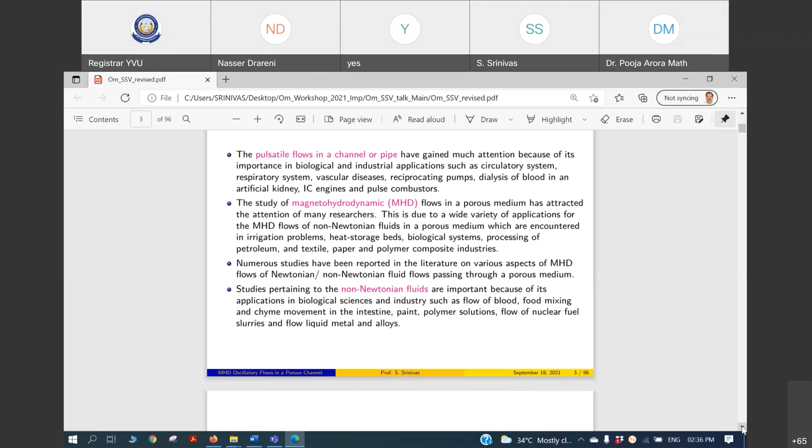We also couple this with MHD. So the study of MHD flows in porous medium has attracted the attention of many researchers. This is due to a wide variety of applications for the MHD flows of non-Newtonian fluids in porous medium, which are encountered in irrigation problems, heat storage beds, biological systems, processing of petroleum and textile, paper and polymer composite industries, and so on.

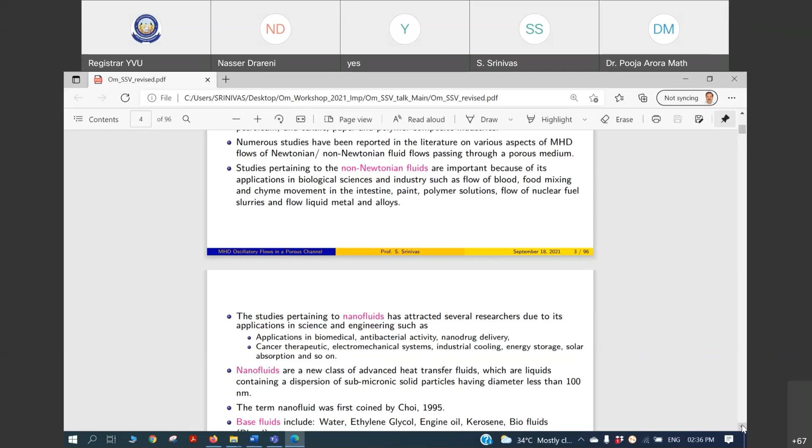Numerous studies have been reported in the literature on various aspects of MHD flows of non-Newtonian fluid flows passing through a porous medium. Further, studies pertaining to non-Newtonian fluids are important because of their applications in biological sciences and industry, such as flow of blood, food mixing, and chyme movement in the intestine, paint, polymer solutions, flow of nuclear fuel slurries, and metals and alloys.

Coming to nanofluids, two of my investigations deal with nanofluids. Studies pertaining to nanofluids have attracted several researchers due to their applications in science and engineering, such as applications in biological or biomedical fields, antibacterial activity, nanodrug delivery, cancer therapy, electromechanical systems, industrial cooling, energy storage, and solar absorption. Nanofluids are a new class of advanced heat transfer fluids, which are liquids containing a dispersion of sub-micronic solid particles having diameter less than 100 nm.

The term nanofluid was coined by Choi in 1995. We will be using base fluids and nanoparticles also. So base fluids include water, ethylene glycol, engine oil, kerosene, biofluids such as blood, and so on. Nanoparticle materials include oxide ceramics, metals, metal carbides, nitrides, and so on.

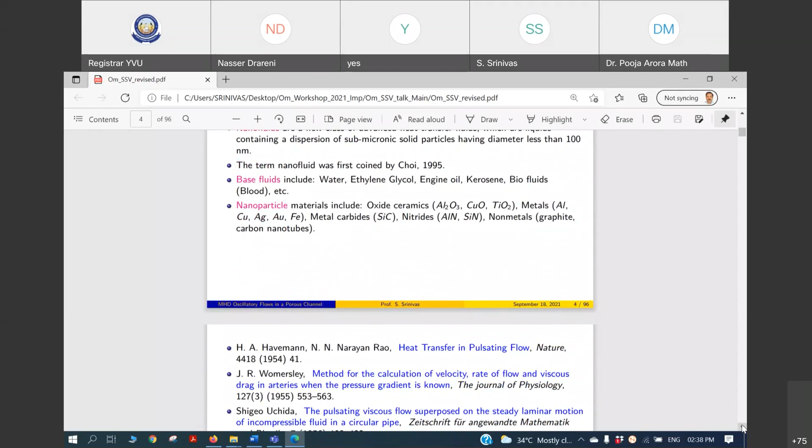Ever since the first investigation of Womersley, Uchida, Sexl, and a few others related to pulsating flow, several mathematical models, and of course some experimental works, were reported in the literature. If you look at the references that I'm going to show, the papers are scattered in robust journals covering a variety of areas.

Heat transfer in pulsating flow was reported by Havemann, published in Nature in 1954 - a method for calculation of velocity, rate of flow, and viscous drag in arteries when the pressure gradient is known. This article appeared in the Journal of Physiology in 1955. Later, Uchida studied the pulsating viscous flow superposed on the steady laminar motion of incompressible fluid in a circular pipe. The pulsating flow of plastic fluid is explored by Phan-Thien and Dudek.

In recent times, several developments took place in oscillatory flow. Recently, oscillatory flow of blood in a stenosed artery was investigated by Haldar. Later, Sud and Sekhon studied a number of investigations pertaining to pulsating flows. One investigation is related to flow through a stenosed artery subject to a periodic acceleration.

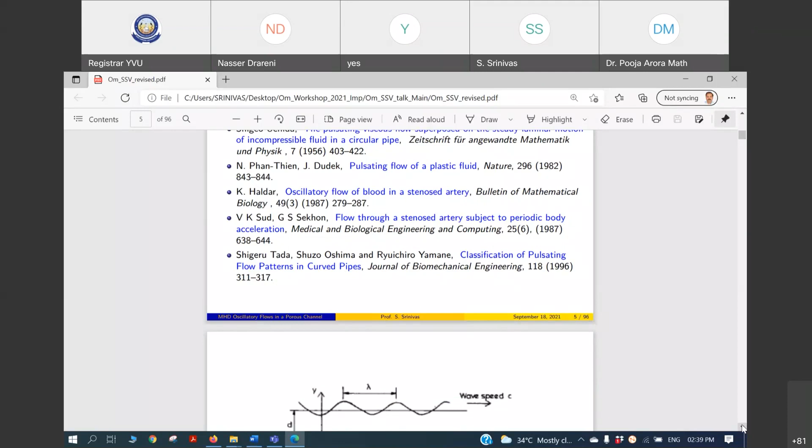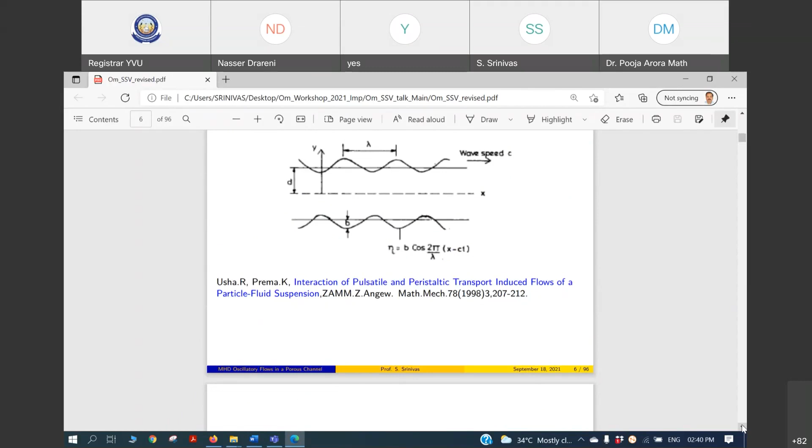Later, Tada, Oshima, and Yamane explored the problem of classification of pulsating flow patterns in curved pipes. Usha and Prema investigated the interaction of pulsatile and peristaltic transport induced flows of a particle fluid suspension, where the walls are extensible, that is, contraction and expansion takes place, and a periodic pressure variant is also there. So the combined effects have been investigated in this study.

The problem of oscillatory flow and its effect on mass transfer and separation of species was investigated by Thomas and Narayan recently, and that paper appeared in Physics of Fluids. Glasgow and Aubry investigated the problem regarding the enhancement of microfluidic mixing using time pulsing. Pulsatile blood flow, shear force energy dissipation, and Murray's law was investigated by Painter, Patrik Edén, and Bengtsson.

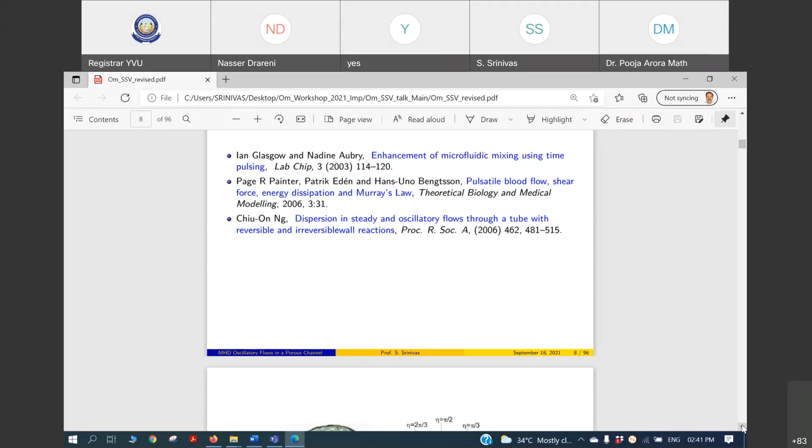Recently, the problem of dispersion in steady and oscillatory flows through a tube with reversible and irreversible reactions was explored by Chiu-On Ng. The analytical solutions for pulsatile viscous flow in a straight elliptic annulus and applications to the motion of cerebrospinal fluid was reported by Gupta, Poulikakos, and Kurtcuoglu.

It's an interesting investigation. They have taken the human problem related to cerebrospinal fluid. They analyzed the flow between elliptic annuli - this is the portion they have taken. The cross section is elliptic in nature, as you can see in this region. They mapped this to an elliptic annulus by using an elliptic coordinate system.

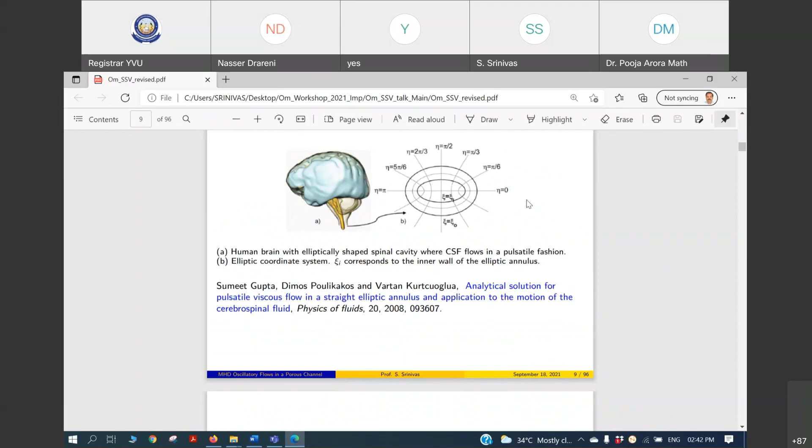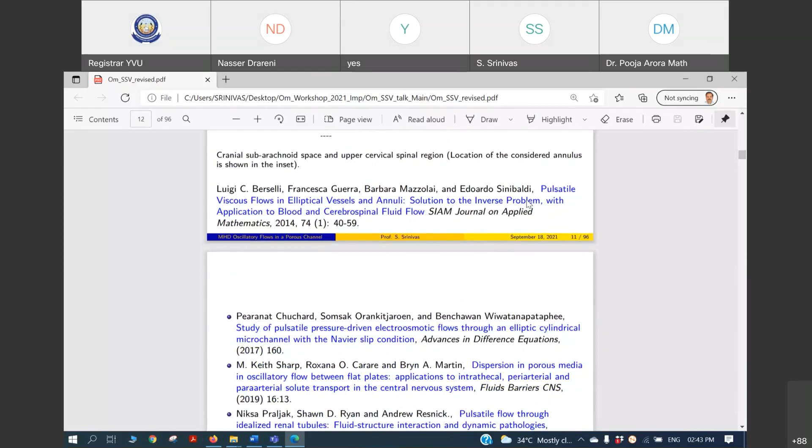This is one interesting investigation by Berselli and the team: the pulsatile viscous flow in elliptic vessel and annuli, solution to the inverse problem, with application to blood and cerebrospinal fluid flow. This was investigated by this team, and the same problem they analyzed, as mentioned in my previous slide.

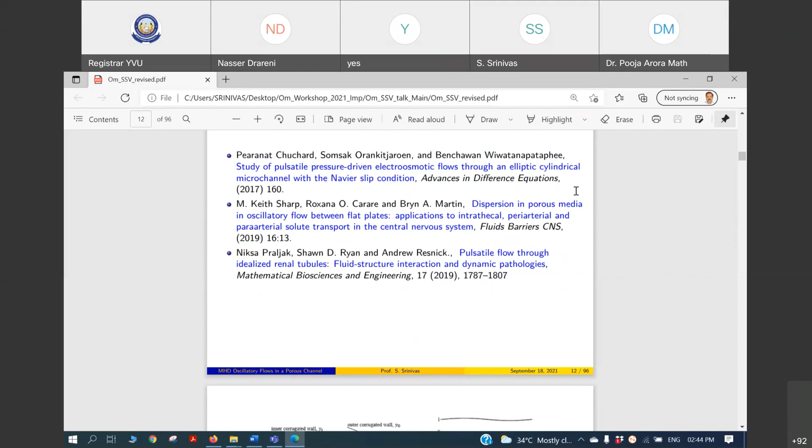Some more developments took place in recent times. A study of pulsatile pressure-driven electroosmotic flows through an elliptic cylindrical microchannel with Navier slip conditions was investigated by Chuchard et al. Later, Keith Sharp, Carare, and Bryn Martin investigated the problem of dispersion in porous media in oscillatory flow between flat plates, with applications to intrathecal, periarterial, and paraarterial solute transport in the central nervous system.

Later, Praljak, Ryan, and Resnick studied the pulsatile flow through idealized renal tubules, fluid structure interaction, and dynamic pathologies. In a recent investigation, Okechi and Asghar investigated the oscillatory flow in a corrugated curved channel.

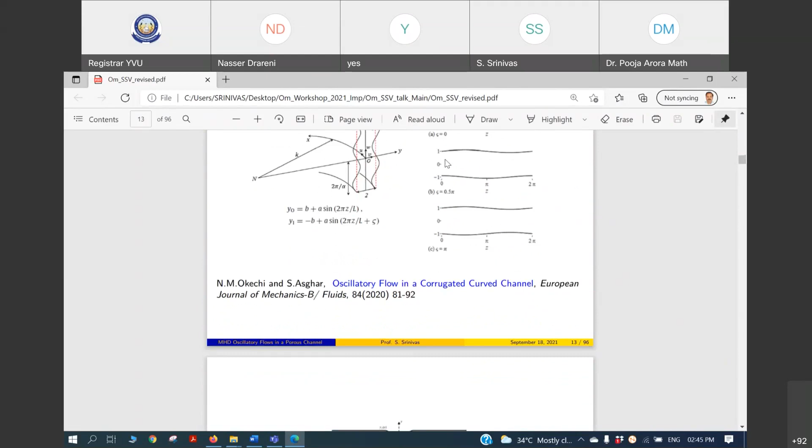This is more like an asymmetric channel. You can see the walls are having different shapes, and if curvature is also there, combined effects of this, they have presented this article. This paper appeared in European Journal of Mechanics, B Fluids.

Later, Ali, Muhammad Umar, Bukhari, and Abbas studied the problem of pulsating flow of a micropolar Casson fluid through a constricted channel influenced by a magnetic field and Darcian porous medium. They investigated the problem numerically. The results appeared in Results in Physics.

Later, pulsating Poiseuille flow in a cement slurry was investigated by Tao and the team. The impact of pulsating flows on particle deposition in forward osmosis with spacers was investigated by Andreas Kastl, Edo Bar-Zeev, and Spinnler, and Thomas Sattelmayer.

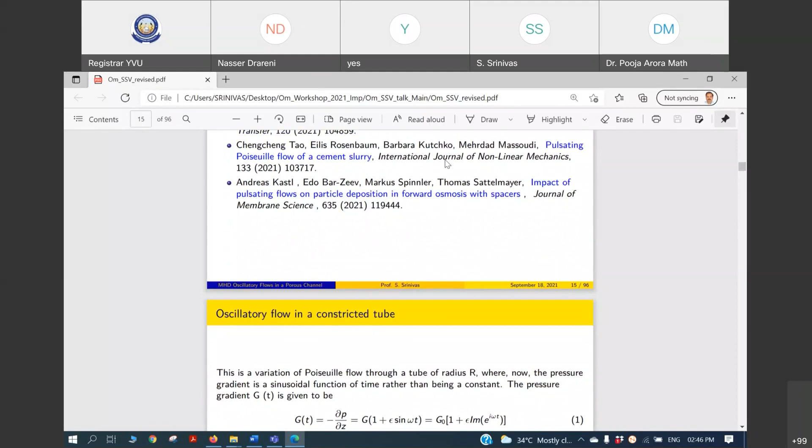So you can see that a number of domains these people have covered, and papers are scattered in robust journals, starting from Nature to Royal Society London and so on. That clearly shows that the pulsating flows problem is of interest for scientists and engineers working in different disciplines.

Let me just explain how the flow takes place in a tube. Assume that this is a variation of a Poiseuille flow through a tube of radius r. I'm taking only a tube, and I'm saying that the pressure gradient is a sinusoidal function of time, as described here in equation 1. Say pressure gradient.

Biologically, it occurs from the heart pumping mechanism. A periodic pressure gradient will be developed, that you can take as some function, some constant term plus sine terms, omega terms, and so on. So some authors will take this, for mathematical purpose, in this form: some constant plus 1 plus epsilon into cos omega t or sin omega t. In general, they take it as e power I omega t.

If cos omega t term is there, after the analysis is over, they take the real part of it. If sin omega t term is there, for analysis purpose, they take the imaginary part of the solution they get.

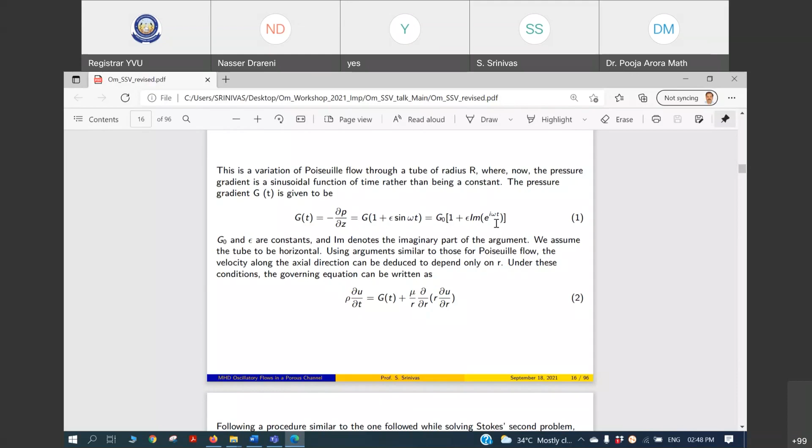In a tube without constriction or anything, if the flow is with a periodic pressure gradient, that problem can be modeled. The momentum equation reduces to this form: rho dou u by dou t, assuming that there is no velocity in other directions, so u is the velocity in the main direction only. So rho dou u by dou t is some function of t, plus maybe this may be from the pressure gradient term. You can take it as some function of t plus mu by r into dou by dou r of r dou u by dou r. I'm using the cylindrical polar coordinate system.

So if you want to study the flow distribution in the tube, you have to solve this equation for u subject to the periodic pressure gradient. So how to find the solution? You can take it as a constant part plus epsilon into e power I omega t. Im stands for imaginary part.

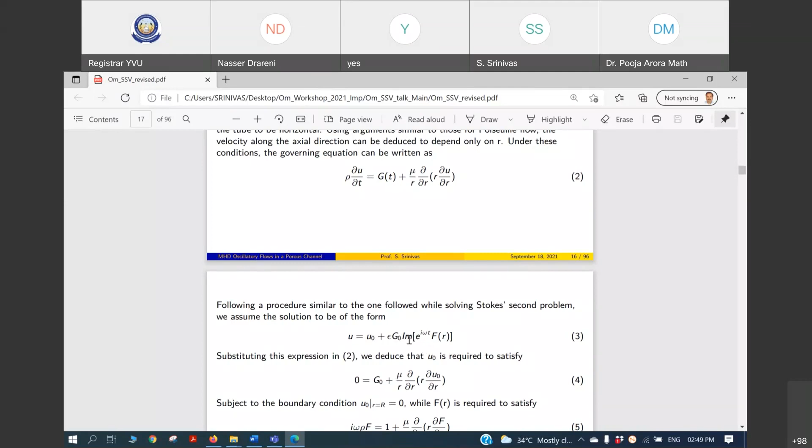into some function of r. So if I substitute u in this form, it comes to this particular structure. You can see that on rearrangement, it will come to a simple differential equation like I omega rho F equals 1 plus mu by r into dou by dou r of r into dou f by dou r.

The boundary conditions are that velocity is 0 on the boundary. Therefore, U on the boundary, r equal to capital R, capital R being the radius of the tube, so velocity on the boundary is taken as 0. You have to solve this particular equation using that condition. The maximum velocity occurs at the center of the channel because it is stress-free at the center of the tube. Therefore, mu dou by dou r is 0 at r equal to 0. That condition also can be used.

Now, on solving this particular equation, you can see that the solution comes to this particular form.

Right, here you have to find capital F. This capital F, when you substitute this and group the like terms, you'll get an equation in F this way. This is nothing but your Bessel's equation. If you identify this, that is at BTech level, we'll be teaching differential equations like x square y double dash

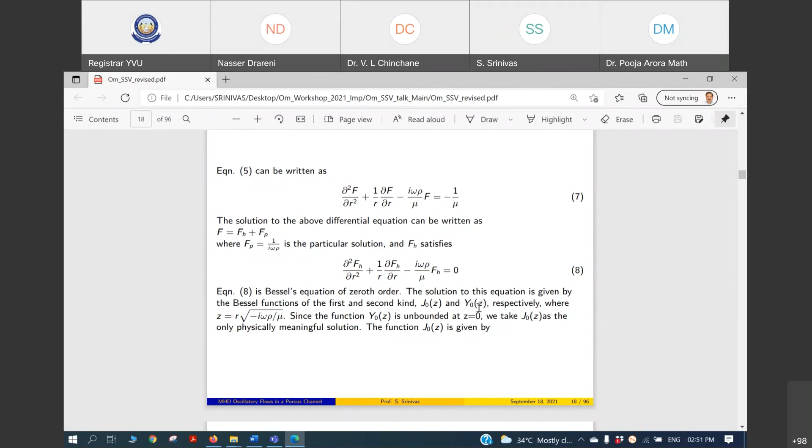So since our physical variables should be bounded, terms like y naught, they have, what you call, they are not defined at 0. Therefore such terms we omit. Therefore only terms containing Bessel functions will be taken.

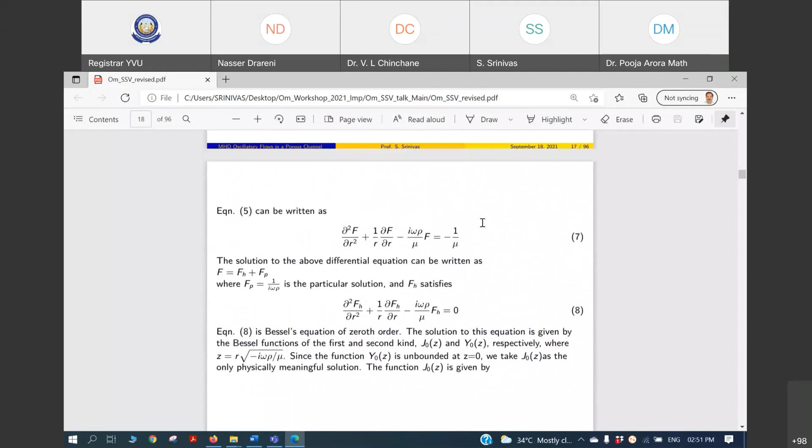Therefore the solution of this equation is going to come as f of r equal to 1 by. Let's not worry about how these terms are coming. Just I want to say that this is in the form of Bessel's equation. And if you solve this equation given in 7, it will come to this particular form. The other term plus b into that, we need not consider.

The only condition we have is this f is 0 on the boundary. Using this condition, you can find the value of a. If you use this condition, what is going to be our a?

First of all, you substitute everything in u, this u naught term and f term, everything here, and use the condition that u on the boundary is 0. Then the solution is coming to this particular form.

You can easily verify whether this is correct or not. When I take r equal to capital R, that is velocity on the boundary, if I take j naught will go away, this is 1, 1 minus 1 is 0. Similarly, when I take r equal to capital R, this is also 0. So u equal to 0 on the boundary, it is satisfying my requirement.

This is the flow distribution in the case of a simple tube. This is oscillatory flow, I've just taken a pressure gradient, periodic pressure gradient. The momentum equation boils down to a simple linear equation, it comes to a structure like a Bessel's equation of order 0.

Terms like y naught I can drop because I want bounded solutions. Then if I estimate the constant, a simple solution I'm able to get for the velocity distribution in a tube. These people describe it as blood flow in an artery, if the artery is of circular nature.

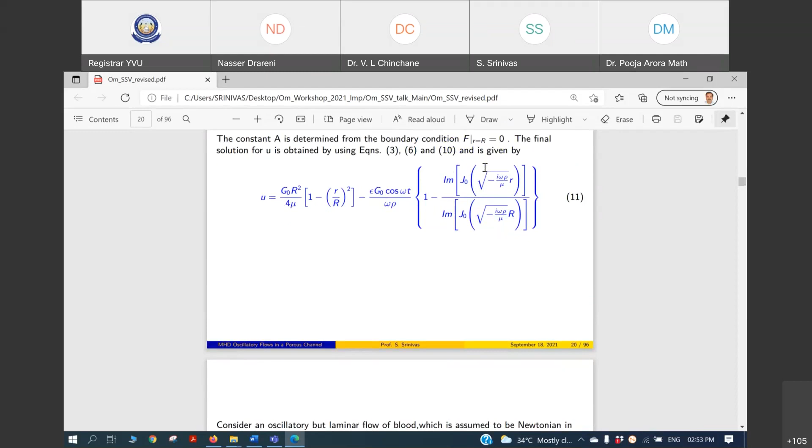Now if there is a small growth or projection inside the lumen of the artery, say instead of tube I just call it as artery, this is like a cylindrical tube. So the shape of the artery I'm taking it as Rx by R naught equal to 1 minus epsilon by 2 R naught into 1 plus cos pi X by D. This is the standard shape of the stenosis.

It's a symmetry case. There are other several geometries for the shape of the stenosis, multiple stenosis, so many other cases also there. But fundamentally the problem is going to be same. If you understand one, rest of the things can be analyzed without any difficulty.

Here, Rx is the radius of the artery in the stenosed portion, and R naught is the radius of the artery. 2D is the length of the stenosis, and epsilon is the maximum height of the stenosis. Okay, this is the problem by Haldar.

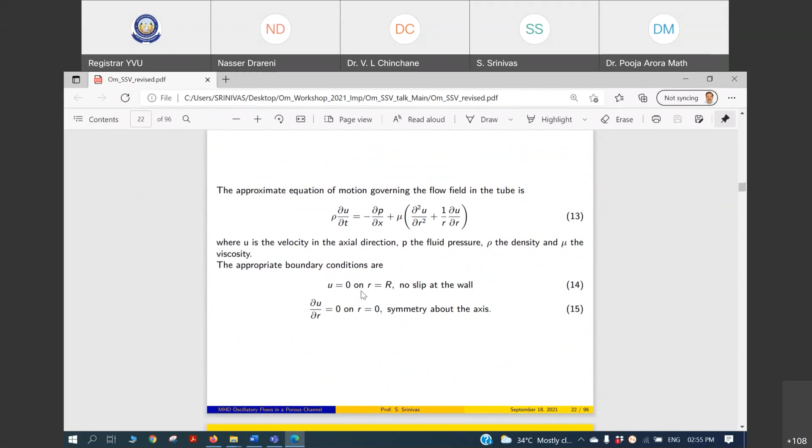Just I wanted to explain how the pulsating flow or oscillatory flow will be in the case of a constriction. Channel also we can study in a similar way, but less investigations are reported in tube. Therefore my interest is to present some ideas pertaining to this.

So the momentum equation boils down to this one. The velocity distribution in other directions we have not considered. It's like a laminar flow. So rho dou u by dou t, the momentum equation reduces to this, pressure, force, viscous forces, everything I have taken.

If some investigations, later investigations deal with body accelerations and so on. If such additives you want to bring, plus those terms also you have to add, that is rho into fx or fy, fz terms will be there. There you have to add the body acceleration terms. The problem is going to be same, more or less. So this particular equation with periodic pressure gradient I am taking.

Therefore, dou p by dou x can be replaced by a term like a naught plus some a1 into e power I omega t, cos omega t or sin omega t, as I can see at the end of the analysis.

The boundary conditions are the velocity is 0 on the boundary. I am not assuming there is slip or any other condition, it's just that I am using a no slip condition. Other conditions can be relaxed, but let's understand the problem first.

Later we can play with the terms. Since at the center of the channel the maximum velocity occurs, therefore dou u by dou r at the center is 0. This is another condition I can make use of. So this equation is subjected to the conditions 14 and 15: velocity is 0 on the boundary, and the maximum velocity occurs at the center of the channel.

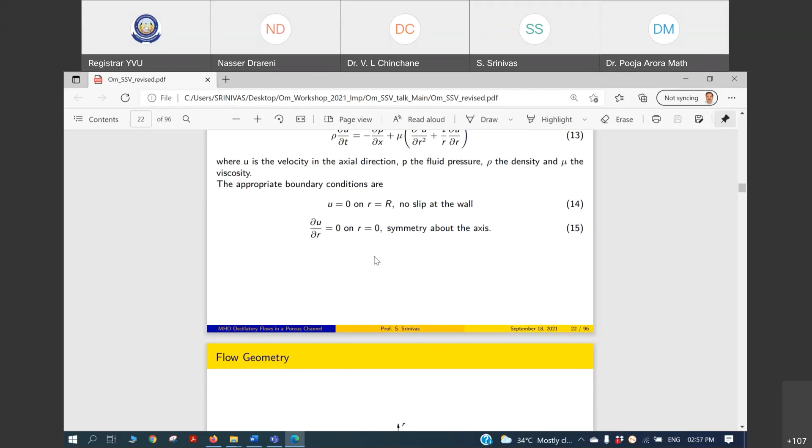Similar conditions I have taken in the case of pulsating flow in a tube without stenosis, so the solution we got earlier will get simplified here. A similarly structured solution I will be getting.

So this is the geometry of the stenosis. As I explained, 2D is the spread of the stenosis, L is the length of the tube, R is the radius of the stenosis, the radius of the tube in the stenosis portion, and R naught is the radius of the tube, and so on.

When I take the pressure gradient term and take the velocity in the form u bar y into e power I omega t, I use non-dimensional analysis by taking y equal to r by r naught. So everything I can put in terms of y, or without that we can put it in terms of r itself. For simplicity, I expressed this in non-dimensional form.

Now, taking velocity in this form u bar y into e power I omega t and the periodic pressure gradient, my problem boils down to investigating this u bar y. What is this u bar y? I have to find out.

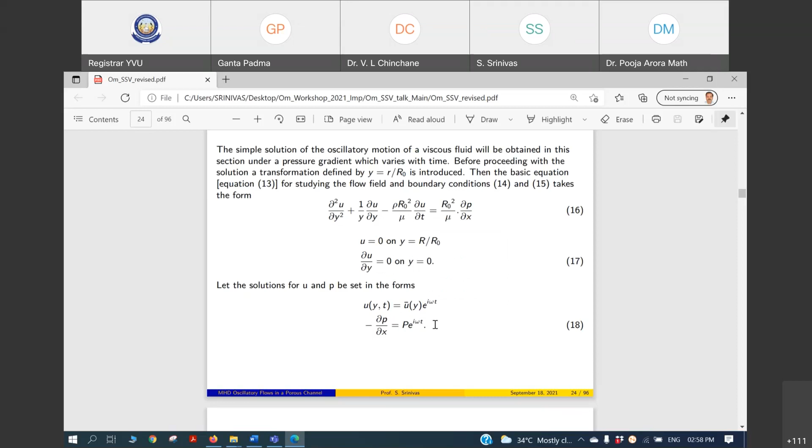This pressure gradient I am assuming is a periodic pressure gradient. So from this I can feel that the solution for velocity can be expressed in a similar structure. Therefore I am taking it as u bar y into e power. Substituting, making use of these two here in the given equation, it boils down to, that is in 16 you substitute 18, and this is what we are going to get.

D square u bar by dy square plus 1 by y du bar by dy minus I beta u equal to r naught square by mu into p. It's a simple substitution. You can properly label the terms. Beta square is rho r naught square omega by mu, as per our convenience we can take the terms.

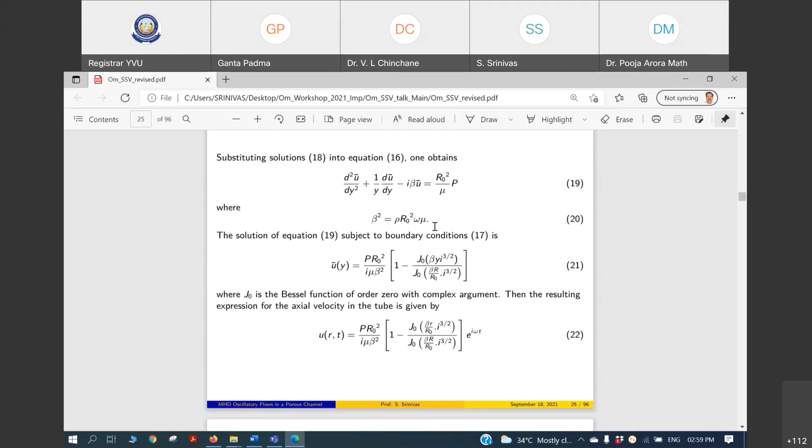I'm calling this beta, here beta square is this term. Now this is similar to what we have seen in the previous slide, it's like a Bessel equation. Of course some non-homogeneous part is also there, so the solution goes like complementary function, particular integral, and so on. This is a Bessel equation of order 0.

Y naught terms I need not consider because I want bounded solutions. When I take the derivative of this Y naught Bessel function of second kind by y, it will have a term that is not bounded at x equal to 0 or y equal to 0. Therefore that term we don't consider.

So u bar y can be found out, but the solution corresponding to this non-homogeneous part in 19, I have given in 21. You can verify whether this solution is satisfying our requirement or not. What is our requirement? The velocity should be 0 on the boundary.

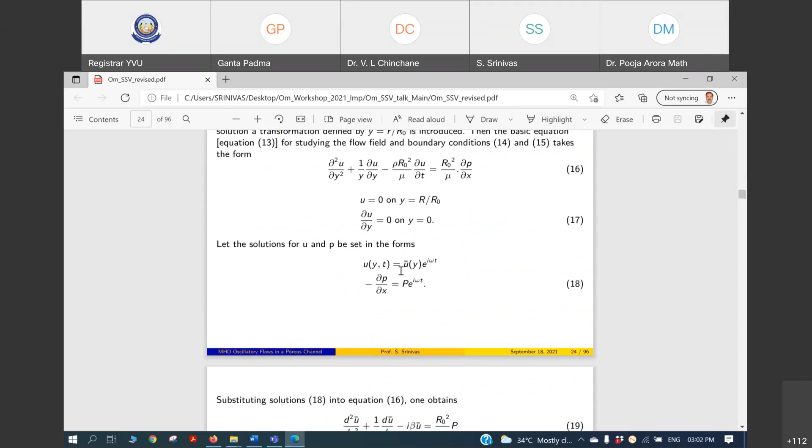What I have done is, after finding u bar y from this equation, I have substituted this in the expression here, u of y equal to u bar y. Whether I write this in terms of r or y, it is one and the same, because that is what I have done here. U r t equal to p r naught square by i mu beta square into 1 minus j naught with this argument, j naught beta r by r naught into i raised to 3 by 2 by j naught beta capital R by r naught into i raised to 3 by 2, into e power i omega t. This is the velocity in the stenosed portion.

Now this can be expressed in the real part. If cos omega t term is given for the pressure gradient, you can take the real part, otherwise the imaginary part. That depends on the nature of how you take the pressure gradient. So Haldar clearly explained how this real part, imaginary part can be taken. For this you can use the reference of McLachlan.

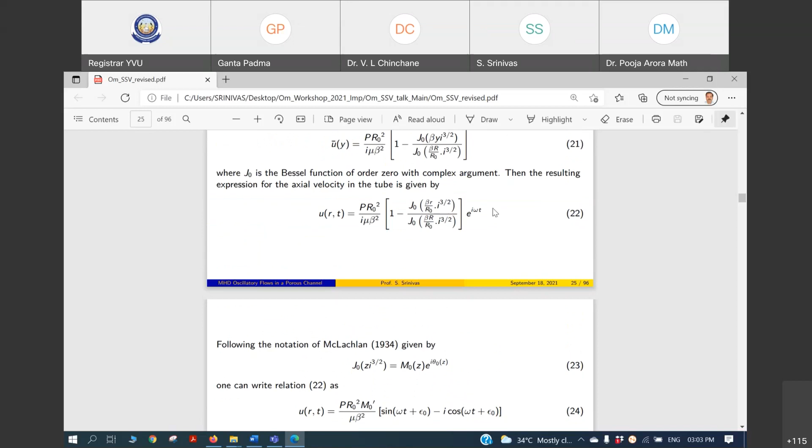Now, once you get this step, the rest of the part is simple. If you want mass flux, it is 2 pi r into u integrated from 0 to capital R, that is the boundary. Similarly, if you want the stress on the wall, you can find that out. So that is what he's doing. You got the velocity, and mass flux is 2 pi u r dr, 0 to r. So when u is already known to us, substitute here and integrate.

The recurrence relations, what we teach at our BTech level, that knowledge is enough to get the mass flux here. It is something like r into j naught you will get. When you integrate it, you will get that in terms of j1. So integration is not at all a problem. Using some simple recurrence relations, you will get the results. So mass flux you can get, and if you want real and imaginary parts, you can do it. There are several ways of doing that. Some people write it in Bessel real and imaginary terms, like ber and bei functions they will use. Others have used different forms.

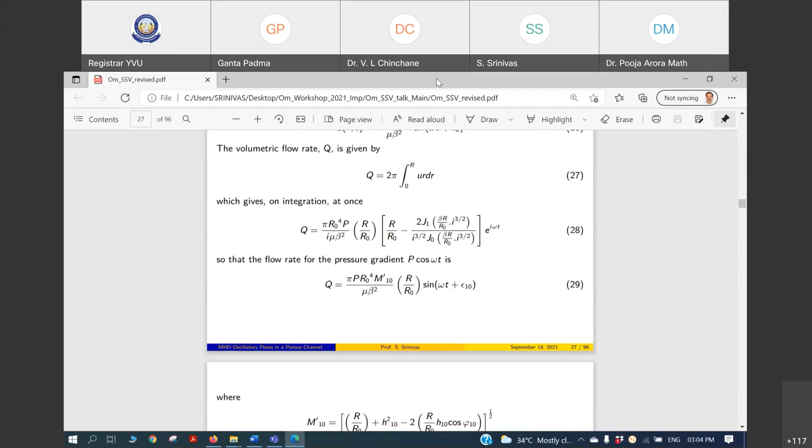Now, if you want the shear stress, it is mu into dou u by dou r. U is a known function now, so you can use this expression to get the stress. He has normalized this by dividing by the flux term. This we can find out is only a derivative term with respect to the independent variable of u. So Q we have already constructed here by taking expression 27. Therefore, you can get the normalized stress, tau r by Q.

Now he has given the plots for this mass flux, velocity distribution, stress distribution, and so on, by varying the heights of the stenosis and so on.

One important factor in the study of pulsating flows is the resistive impedance, defined as minus dou p by dou x by Q. So the pressure gradient we know, Q we have just calculated, and the ratio is your resistive impedance. So it is not difficult for us to get the expression for Z. This is known, and Q also we have calculated, that is the integral from 0 to R of u r dr into 2 pi.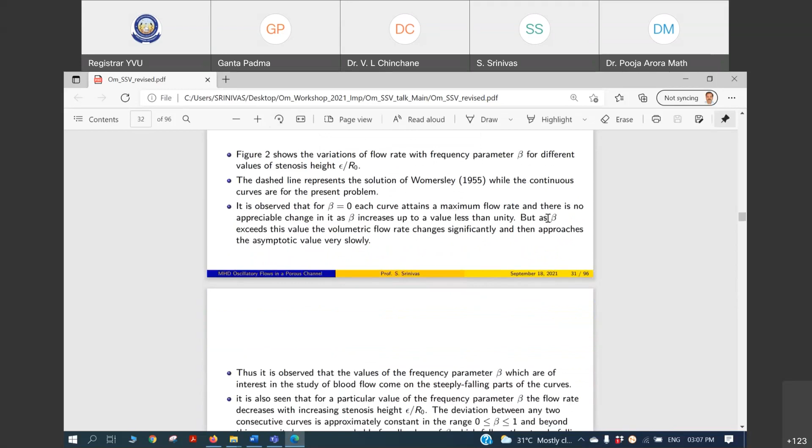The regions where it falls drastically are regions of interest. This shows the variation of flow rate with frequency parameter. The figure demonstrates that the dashed line, with epsilon by r equal to 0, is the solution given by Womersley, that is without stenosis, just a tube. You can see that in all these cases, when beta is equal to 0, each curve attains a maximum flow rate.

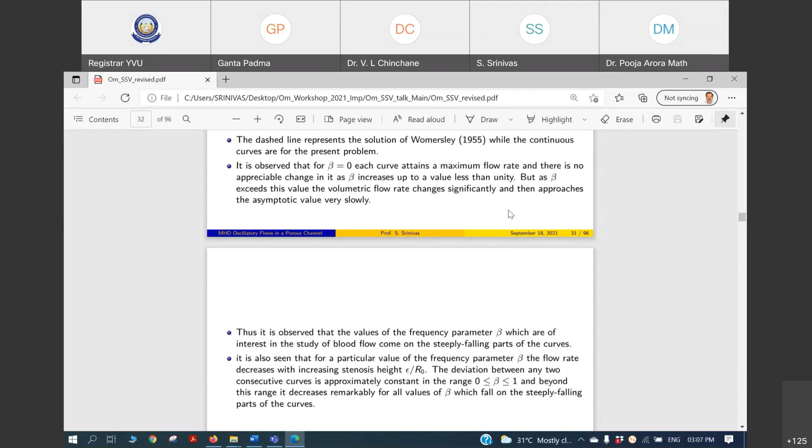So up to some value it is almost the same, not much variation, but from 1 to 6 or 1 to 5, there is a drastic variation in the mass flux. At beta equal to 0, each curve attains a maximum flow rate, and there is no appreciable change in the profile as beta increases up to a certain value less than unity. But once beta exceeds that value, say exceeds 1, there is a steep fall. So as beta exceeds this value, the volumetric flow rate changes significantly and then approaches the asymptotic value slowly. That is what you can observe from the profile, as it just touches the asymptote.

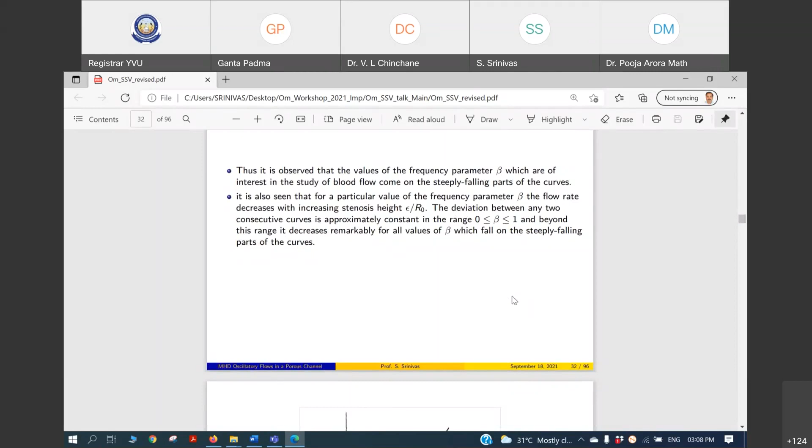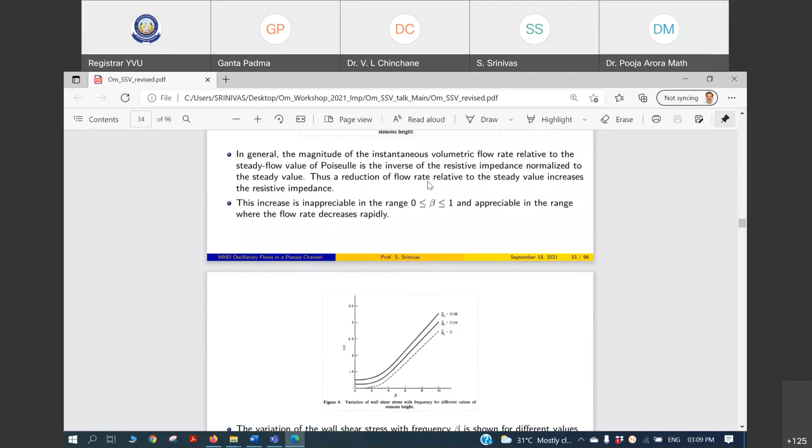Similarly, you can draw graphs for the normalized impedance, shear stress, and so on by varying the heights of the stenosis. You can see that impedance, the measure of resistance to the flow, increases as the frequency of the pumping increases. The impedance also increases with the projection of the lumen, that is, as the height of the stenosis increases, impedance also increases. But as seen in the previous profile, up to a certain value there is not much variation, while in some portions, approximately up to 6 or 7, there is a drastic variation. So this increase is inappreciable in the range 0 less than or equal to beta less than or equal to 1, and appreciable in the range where the flow rate decreases rapidly.

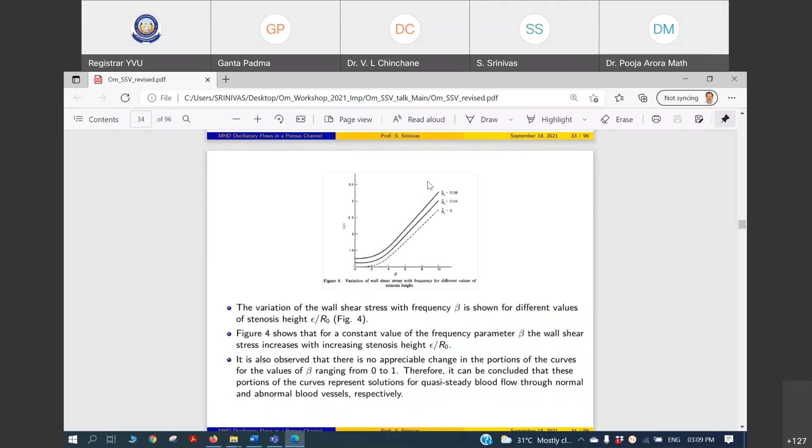Now, if you look at the variation of stress, he has given profiles with increasing heights of the stenosis. The stress increases as the frequency parameter increases. Similarly, as the projection, that is the height of the stenosis, increases, the shear stress also increases. These are some conclusions you can draw from the stress profile graph.

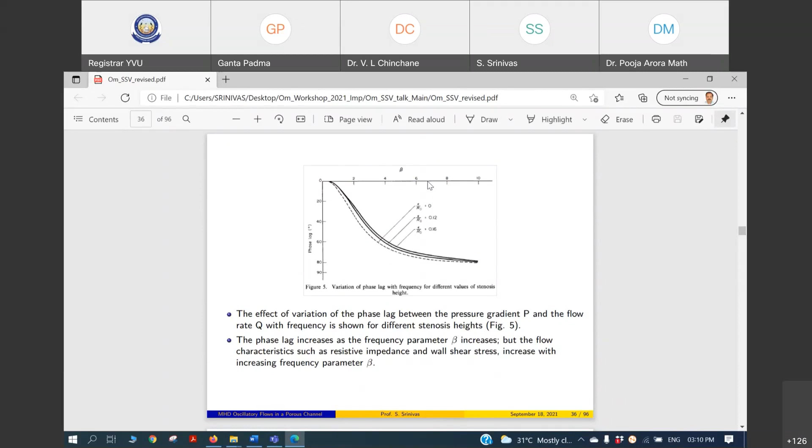If you understand this problem, many other problems related to body accelerations with different shapes can help you understand the pulsating flow in the lumen of the artery. Similarly, you can study the phase lag. In his paper, he has shown how this phase lag affects the flow variables as the frequency parameter increases. This analysis one can read by downloading the paper.

Now what I want to say is, if you look at the literature, mathematical models reported are related to different shapes of stenosis, cross sections like elliptic and so on, annular portions, cylindrical or channel, and so on. The flow conditions also change, like external body accelerations, and wall conditions also have changed. Different techniques people have adopted: some focus on analytical investigation, and some simulate the results, how the flow distribution is taking place, using packages like CFD and so on. Many investigations are also reported related to rheological models.

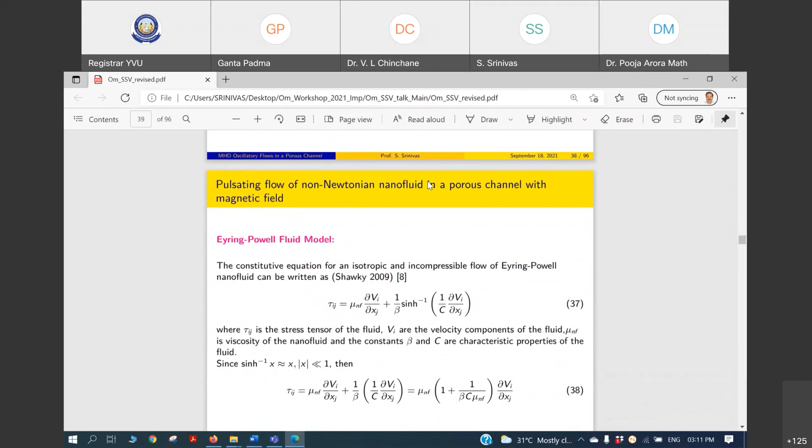Now, in recent times, we have done a couple of problems in a porous channel. Let me just give some outline. I may not be able to do the problem completely, but I'm going to explain a sketch of what I have done.

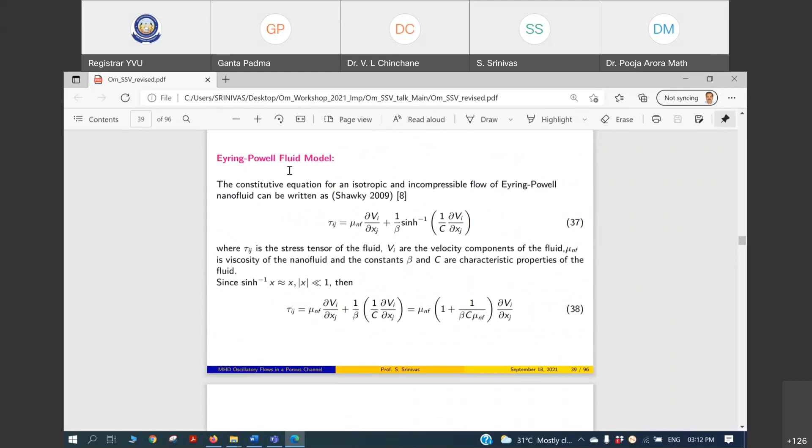It's very simple to understand. Sin h inverse x can be approximated by x. So the term I have here, using that I can write it as 1 by c into dou v by dou x. So I'm taking the stress strain relation this way. This is an approximation. I have seen a couple of investigations accounting for the nonlinear factors also, but that makes the problem more complex to capture the nonlinear effects.

So here, this is the flow geometry. Injection at one wall, suction at the other wall, and the flow is subjected to a magnetic field. Flow is in the direction of y-axis, and the main flow direction is the x direction. V equal to V naught I am taking. There is injection at one wall and suction from the other wall. So this is the flow geometry.

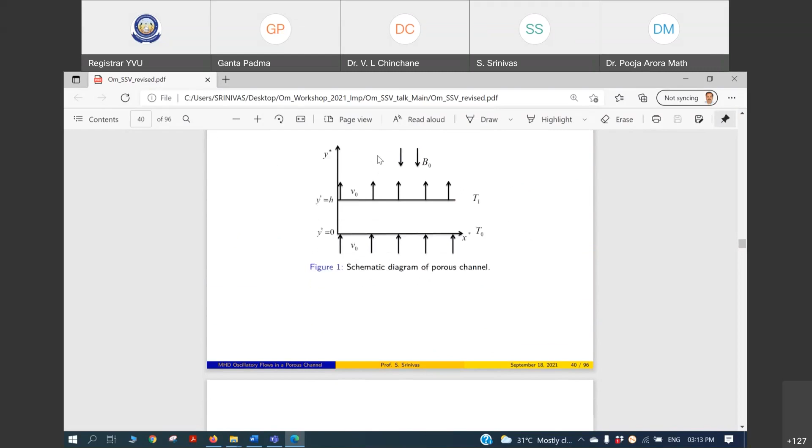Under these conditions, the conservation of mass and momentum equations reduce to this one. Here, the investigation I am talking about deals with oscillatory flows, therefore I am taking a periodic pressure gradient. Some people take it as A naught plus A1 into e power I omega t, because some nonlinear terms we are going to accommodate. Those who accommodate the nonlinear effects have to take a small perturbation parameter. Here is the pressure gradient.

The other models have taken them as linear models, therefore A naught plus A1 into e power I omega t, they will take. Those models which deal with the nonlinear terms, that parameter has to be attached to the pressure gradient. So the rest of the part is the same. Here, this A is the amplitude of the pressure gradient, rho is the density, and so on.

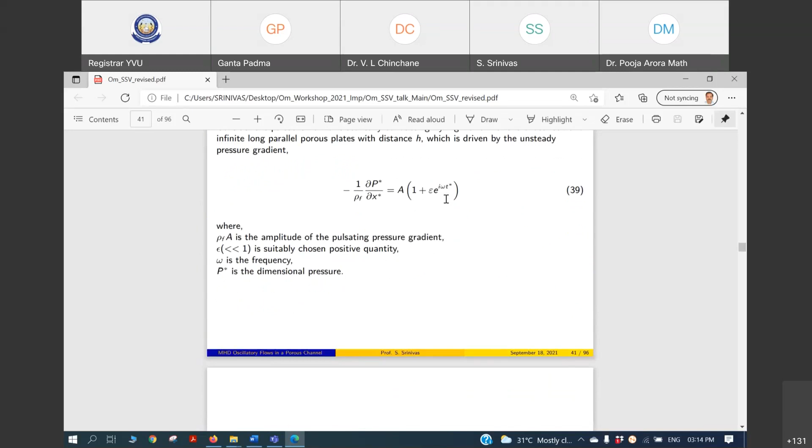P star is the pressure, omega is the frequency term, and so on. Of course, we don't have to worry how this pressure gradient is occurring. If it is in a human system, a periodic pressure gradient will be developed due to the heart pumping mechanism. Any biomedical fluid problem, if you take an artery and so on, this term they will take as granted, right?

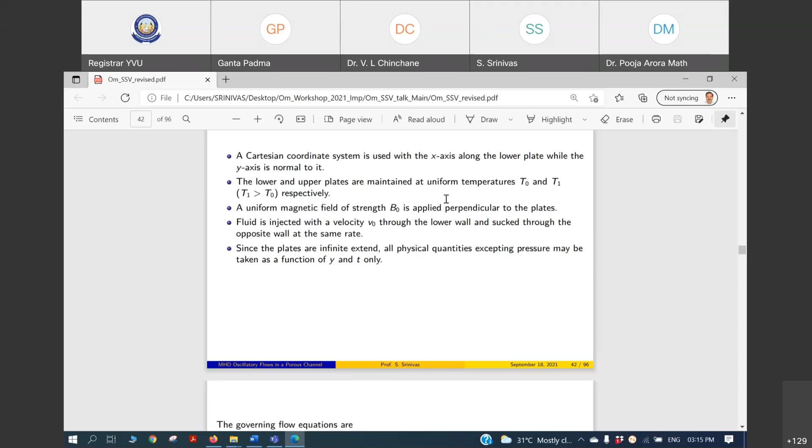So under certain conditions, we can simplify the momentum equation. Some conditions we have taken: we have applied a Cartesian coordinate system, the lower plate with one temperature, the upper plate with a different temperature, something like T1, and T1 is greater than T0. A uniform magnetic field of strength B0 is applied perpendicular to the plates. Fluid is injected with a velocity V0 through the lower wall and sucked out through the upper wall. The plates are infinitely extended, infinite length. So all physical quantities except the pressure may be taken as functions of y and time.

So under these conditions, you can see that in the momentum and conservation of mass equations, the term dou v by dou x plus dou v by dou y goes away, because dou u by dou x equal to 0. That says that u is a function of y alone. Therefore other derivatives with respect to x vanish, and the momentum equation gets a term v into dou u by dou y, where v is replaced by v naught. So this is the flow equation for the porous channel case.

This is related to the rheology part, the magnetic field which comes from the term, and so on. All these terms we have properly accommodated, including radiative heat flux. Radiative heat transfer, heat flux term, everything.

The boundary conditions: we have to solve these equations subject to the conditions that velocity is 0 at the walls, equal to 0 at the upper wall, equal to 0 at the lower wall. At the lower wall, the temperature of the plate I'm taking as T0, and for the upper one I'm taking it as T1. Now using these conditions, you can give meaning to all these terms.

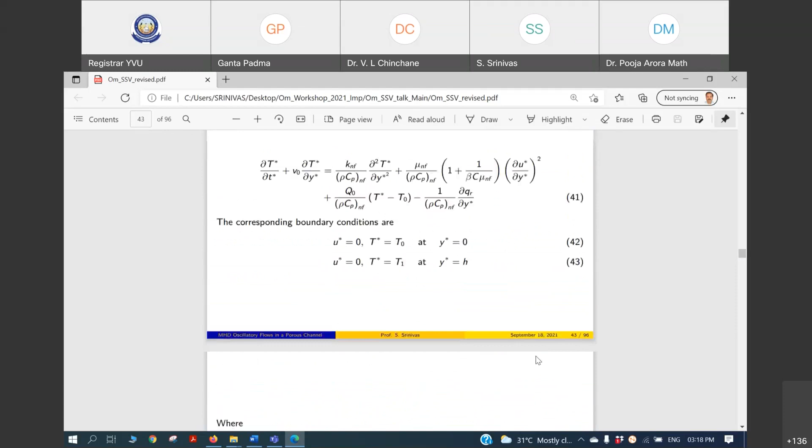Mu is the dynamic viscosity of the nanofluid. Whenever there is an N, Sigma NF is the electrical conductivity of the nanofluid. T star is the temperature of the fluid, that is the temperature equation also I have taken, the energy equation. KNF is the thermal conductivity of the nanofluid. Similarly, rho Cp NF is the heat capacitance of the nanofluid. Q naught is the coefficient of the heat source term, that is, here I'm taking the heat source term, this one.

Then qr is the radiative heat flux. So these are, every term can be defined.

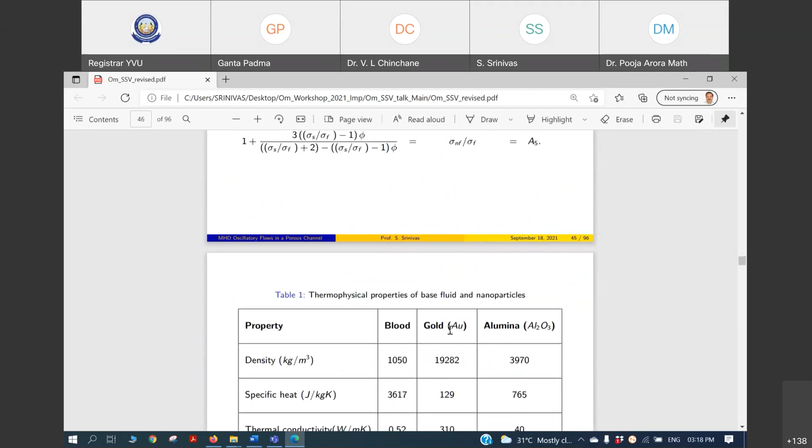Now, using the physical characteristics of the nanofluids, I'm defining some terms like A1, A2, A3, A4, as described in equation 44. Thermophysical properties of the base fluid and nanoparticles, we can get from the literature. I'm making use of values for blood, gold, that is Au, and alumina, Al2O3.

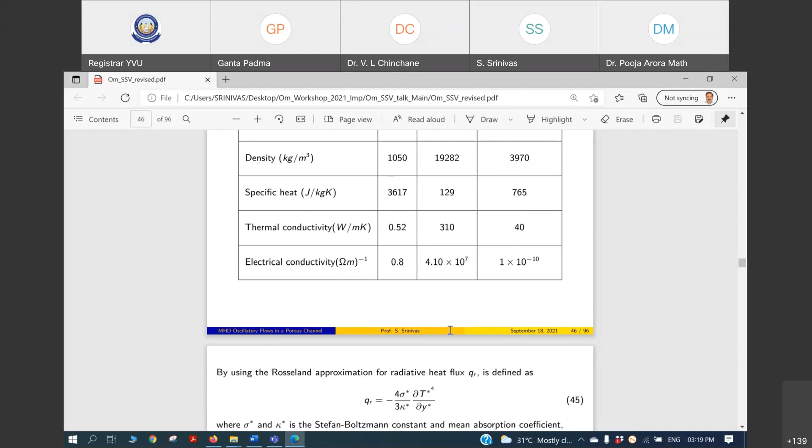For numerical analysis discussion purpose, these terms you can take as granted because these results are reported in the literature by experimentalists. Now, using the Rosseland approximation for radiative heat flux QR, defined as in equation 45. There, sigma star and K star are the Stefan-Boltzmann constant and mean absorption coefficient.

Then I'm approximating this nonlinear term T power 4 as a linear function of temperature, expanding T power 4 about T1 using Taylor series expansion and neglecting higher order terms. We get T power 4 can be approximated by the term given in 46, as 4 T1 cube T star minus 3 T1 power 4.

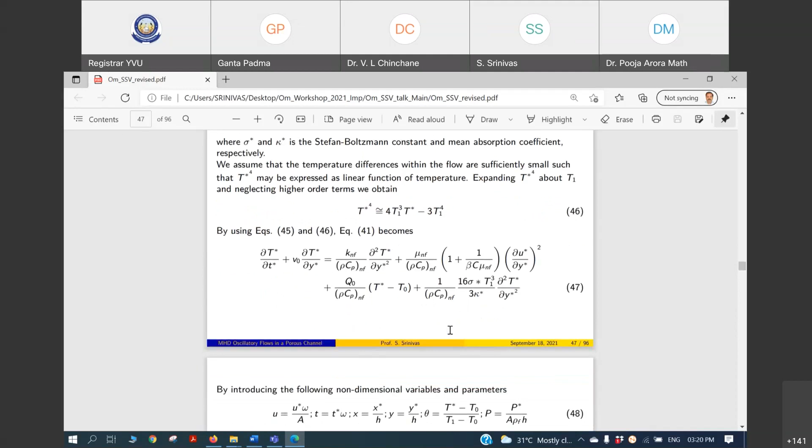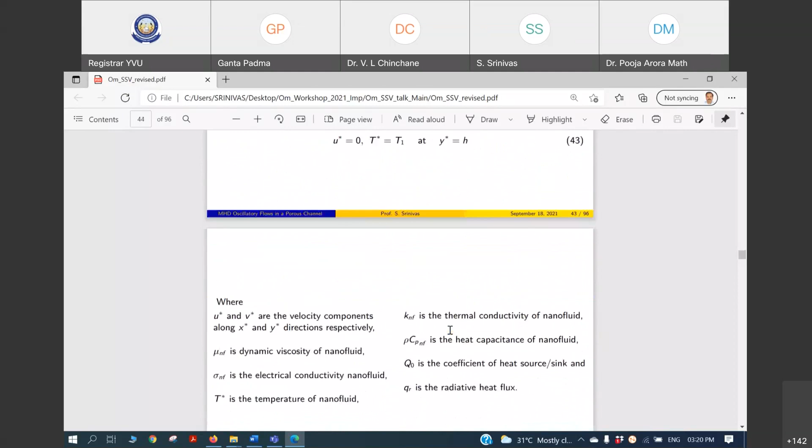Making use of this in the energy equation here, which is given in 41, that boils down to an equation like this. So there are some nonlinear terms here.

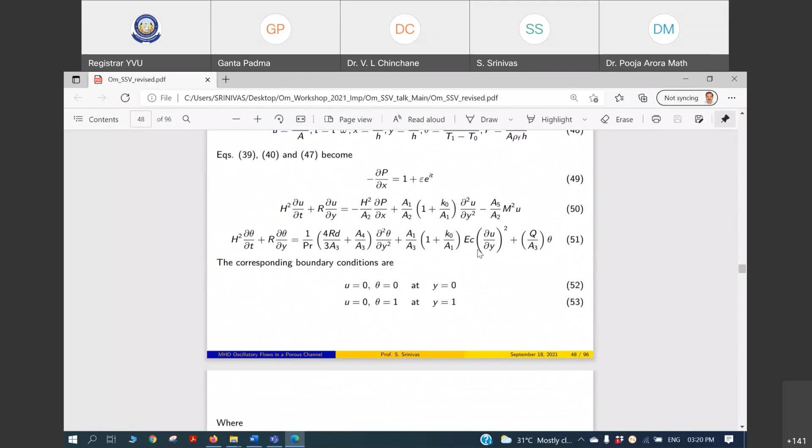So I have used the non-dimensional scheme in terms of the defined non-dimensional variables. The equations can be rewritten this way, given in 49, 50 - that is the pressure gradient term, momentum equation, and energy equation. Everything I am putting in terms of y.

So your variables are functions of y and t. Here a1, a2, a3, they are all known variables.

Now, in terms of the boundary conditions: u equal to 0, theta equal to 0 at one wall, and u equal to 0 and theta equal to 1 at the other wall.

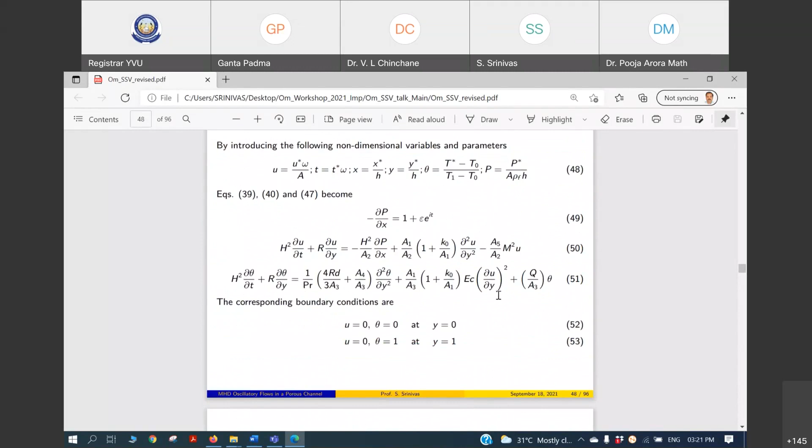Here, h is your frequency parameter, r is the cross flow Reynolds number, capital R, M is the Hartmann number, Prandtl number, Eckert number, and so on. Every term can be physically spelled out. Here is the Prandtl number, this is the Eckert number, this is the heat source parameter, and so on.

Now coming to the solution aspect, I'm taking U naught as - because the pressure gradient has some term plus epsilon into some other term - that motivates us to express the variable u this way: u naught of y plus epsilon u1 of y into e power i sigma t. Similarly, theta is theta naught plus epsilon theta 1 plus epsilon square theta 2, and so on.

If I'm correct, even if you take up to the second order term, epsilon square into u2, I think u2 reduces to 0. So we have not considered that term.

Now with this assumption, what is it that we have to find? U naught, u1, theta naught, theta 1, theta 2 - we have to find these. So substitute 54, 55 in the non-dimensional form of the equations that govern the flow, that is momentum and energy equations. You will get a system of equations.

If you substitute the expression and collect different powers of epsilon, we get equations 56, 57, 58, 59, and 60. So the non-homogeneous conditions, if any, we take in u naught or theta naught, and homogeneous conditions we take on the other terms.

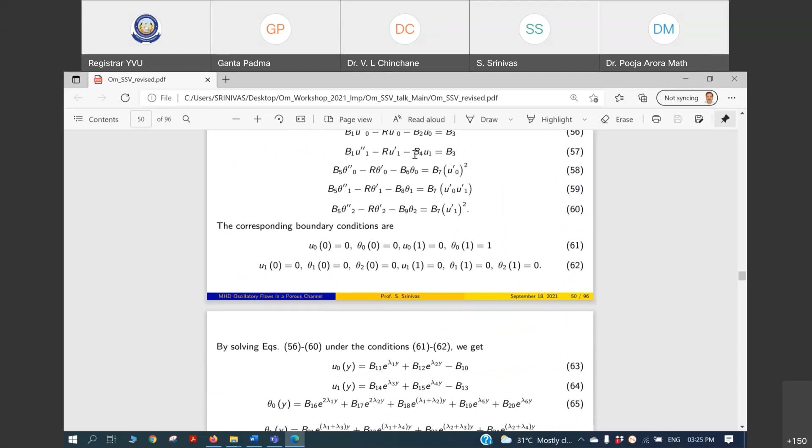Once you know U naught, U1, theta naught, theta 1, theta 2 with the relevant boundary conditions, you incorporate them in equations 54 and 55 to get the solution that governs the flow. So that is exactly what we did here, solving 56, 57, 58, 59 and 60 with the conditions 61 and 62, incorporating the results obtained in 54 and 55. You get the velocity and temperature distributions as given here. The expressions for U naught, U1, theta naught, theta 1, theta 2, everything is given here. Once these velocity and temperature distributions are known, the rest of the analysis follows without any problem.

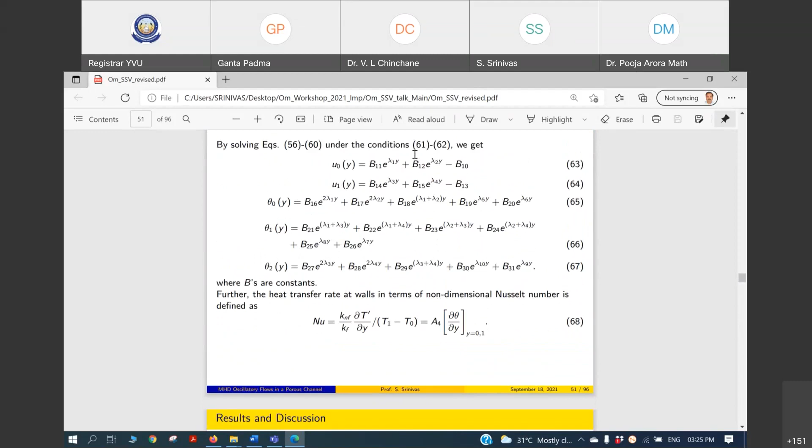For example, Nusselt number, the rate of heat transfer, we can find out. That is given in expression 68, which is simply some constant A4 that I defined earlier, times the temperature gradient. If you want the lower wall, take y equal to 0. If you want the upper wall, take y equal to 1. That is how you find the Nusselt number. Flux and other things you can also find out. For a flux term, if the width of the channel is h, you take the integral 0 to h of u dy. If it is a tube, you take 2 pi r u dr from 0 to r. So once these variables are known, you can find heat flux, shear stress, Nusselt number, all these quantities.

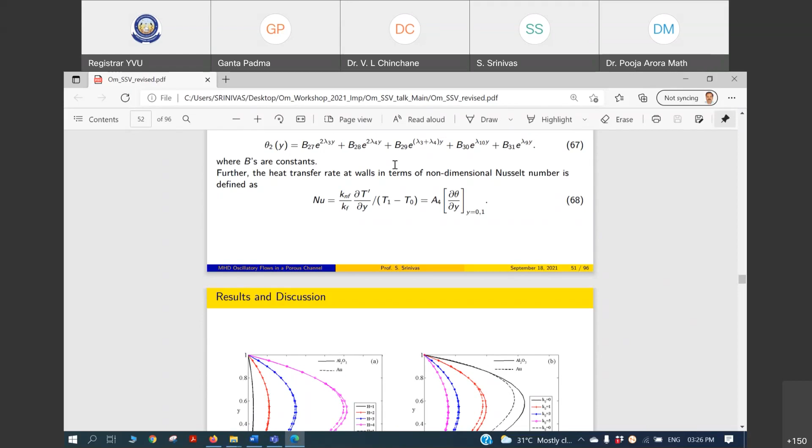Now we have done some numerical work. I'm not going to explain all the figures, I just want to show what we have done. We have plotted the profiles for velocity distribution, how it changes with the magnetic field, and the effect of K naught.

For two particles, that is alumina and gold, that is Au, for two nanoparticles we have explained here. You can see that with increase of h, the flow velocity reduces. And for Au, you can see there is greater velocity and temperature when compared with the alumina.

Similarly, the velocity distribution varying with frequency parameter - here this is the frequency parameter and K naught, that is the rheological parameter - this is varying with the magnetic parameter, and how the velocity distribution varies we have also discussed in our paper. If you want these two papers I can send them, but due to time limitation, since they have given me 1 hour 15 minutes, I want to complete everything in time.

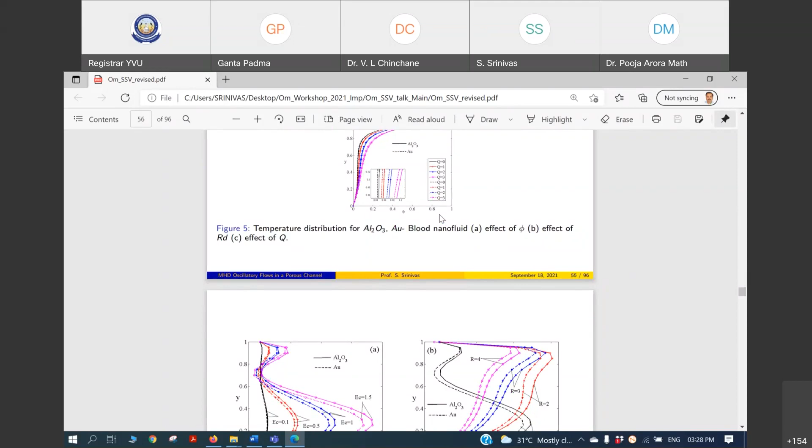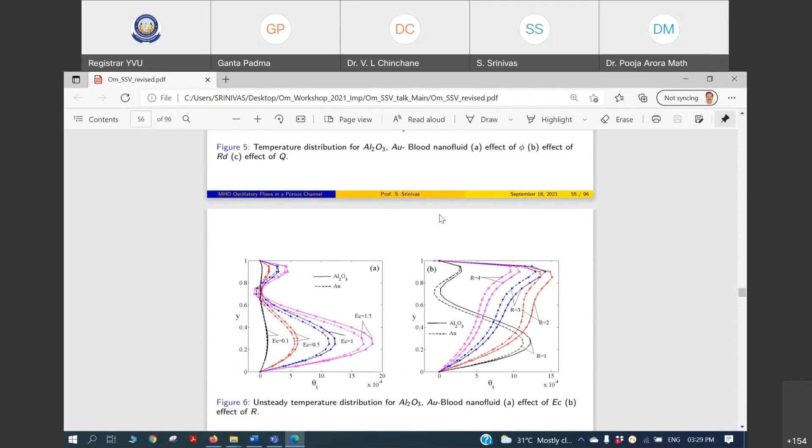Similarly, the temperature distribution for Al2O3, that is alumina, and Au, we have given it for the effect of phi, and the effect of radiation term and heat source we have presented in figure 5, how it is changing, we have presented in our analysis. For the benefit of the participants, if you want, I can send these two papers - complete description one can find in that.

So the unsteady temperature distribution for Al2O3 we have also presented, how it changes for alumina and Au. The unsteady temperature part - unsteady means only those that are time dependent - how it changes with Ec, frequency parameter, and so on. I've given the rate of heat transfer also, which we have analyzed.

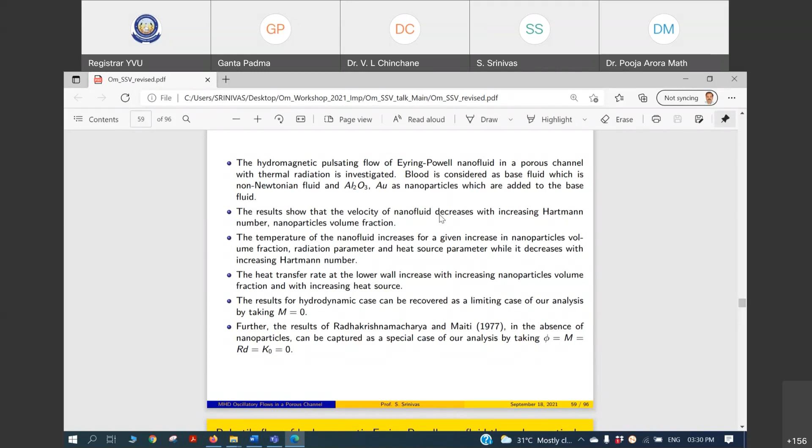Some of the conclusions, in a nutshell: the hydromagnetic pulsating flow of a nanofluid in a porous channel with thermal radiation has been investigated in this work. Blood is considered as the base fluid, which is a non-Newtonian fluid, and the nanoparticles chosen are Al2O3 and gold. The results show that the velocity of the nanofluid decreases with increasing Hartmann number and nanoparticle volume fraction. The temperature of the nanofluid increases with increasing nanoparticle volume fraction, radiation parameter, and heat source parameter, while it decreases with increasing Hartmann number. Other interpretations can be found in the paper. The heat transfer rate at the lower wall increases with increasing nanoparticle volume fraction and with increasing heat source. As a hydrodynamic case, the results can be recovered by taking the magnetic parameter m value as 0.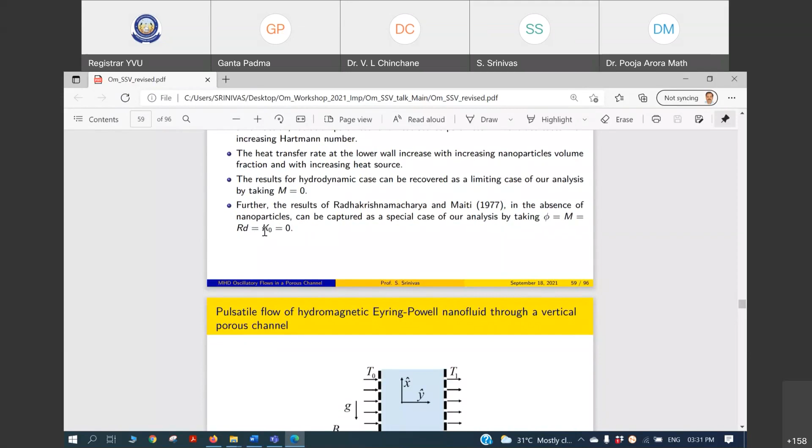The results for Radhakrishnamacharya can be obtained by suppressing certain terms from our analysis, that is, phi is 0, m is 0 (no magnetic field, no radiation term), and the fluid is taken as Newtonian. If these terms are removed, our results converge to the results of Radhakrishnamacharya. These are some important results from our analysis, but they are discussed at length in the paper, which I'll pass on to the convener. Interested authors and participants can collect those papers.

Similarly, we have investigated the pulsating flow of hydromagnetic Eyring-Powell nanofluid through a vertical porous channel. The problem is more or less the same, only this time it's a vertical channel. The rest of the definition is almost the same: there is suction/injection from one wall and suction from the other wall, and the system is subjected to a magnetic field, and so on.

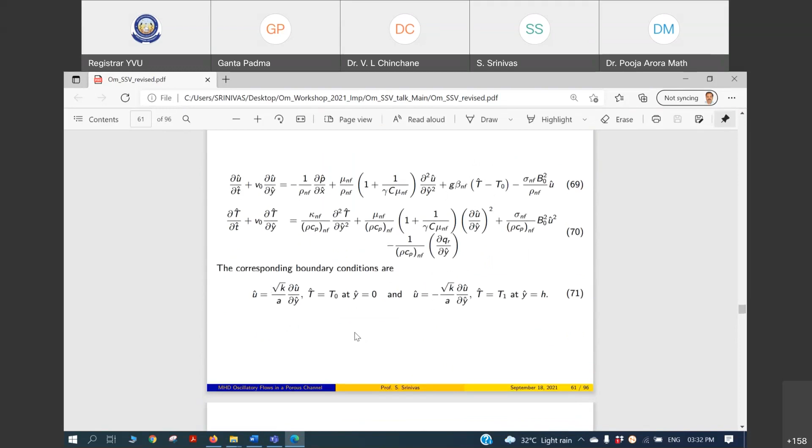We have given the momentum equations. The only difference is that the buoyancy effect comes in addition to what we studied previously. The rest is almost the same, but here we have taken slip velocity into account; temperature slip we have not taken. Temperature is T0 at one wall and T1 at the other wall, as in the previous case. The rest is almost similar.

We have taken this with different nanoparticles, and basically we have taken the base fluid as blood. For analysis purposes, we have taken these values for density, specific heat (CPK), and so on.

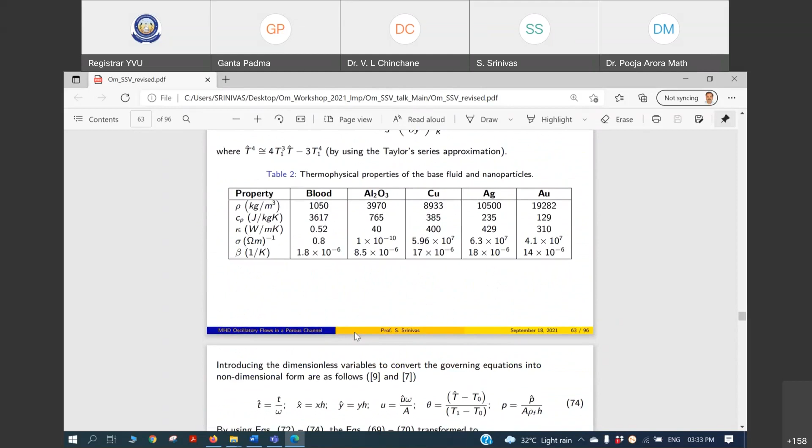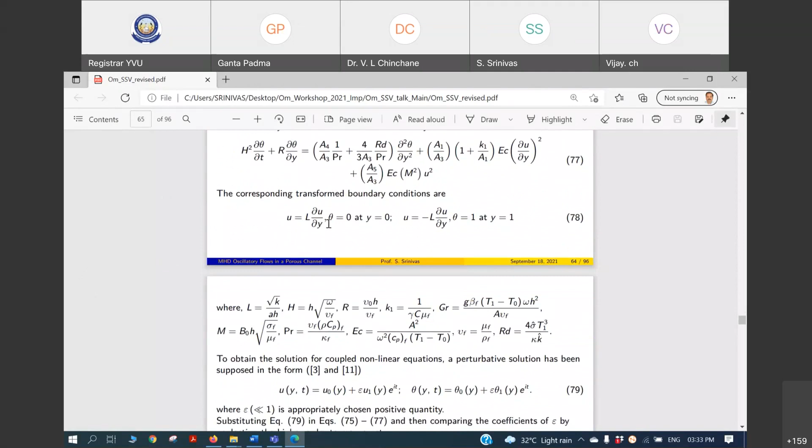Using the non-dimensional scheme, those governing flow equations reduce to equations 76 and 77, the momentum equation and energy equation. L is the slip parameter. In addition, we get this L term, and the Grashof number also appears in addition. The analysis is almost the same.

U is taken as U0 plus epsilon times U1(y) times e to the power i t. Theta is theta naught plus epsilon theta1(y) times e to the power i t. We are using a perturbation technique here. Substituting this into the governing flow equations and collecting like powers of epsilon, you get a system of ordinary differential equations as described in equations 80 to 83.

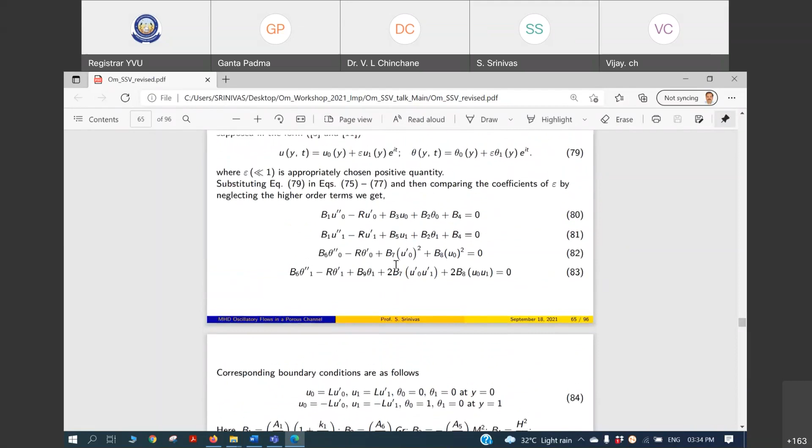So if you know the solution for equation 82, these are the conditions we have to solve. Those equations are solved using these conditions: U0 is L into U naught dash, theta naught is 0, and theta 1 equals 0 at y equal to 0. Similarly for the other conditions.

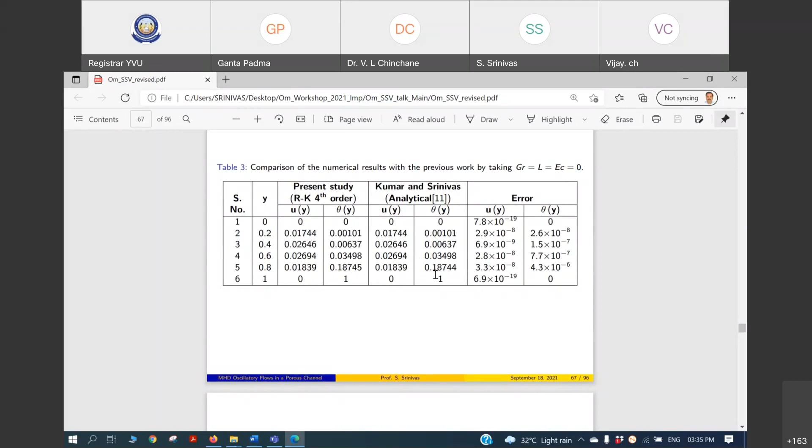The solution mechanism is similar to the previous case. Once you get the solution for theta and u, the stress and heat transfer rate can be estimated. Just to validate our results, we cannot compare with any experimental work because, to my knowledge, such works are not available. Therefore, we compared our results from the numerical method with those from the analytical method, and they are almost matching. So we proceeded with the other discussion. Error is also given here, and it is almost negligible.

These two papers I'm going to share with the convener; interested participants can collect them from the relevant persons. This shows the effect of volume fraction on velocity and temperature distribution. Similarly, we estimated how the magnetic field influences velocity and temperature distribution for two different values of the slip parameter, 0 and 0.1, and so on.

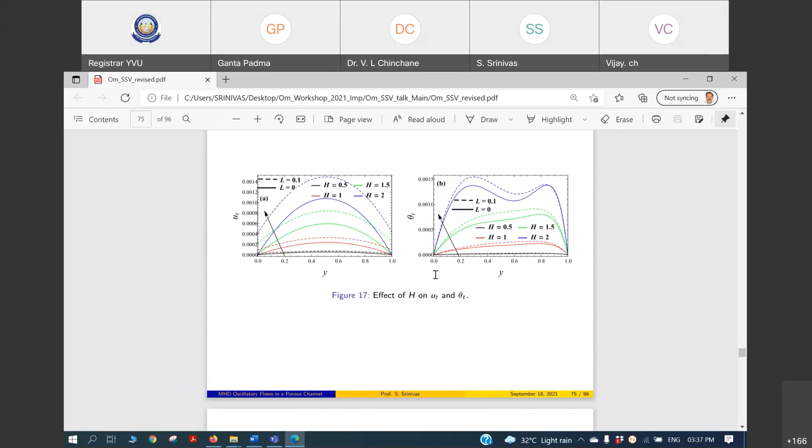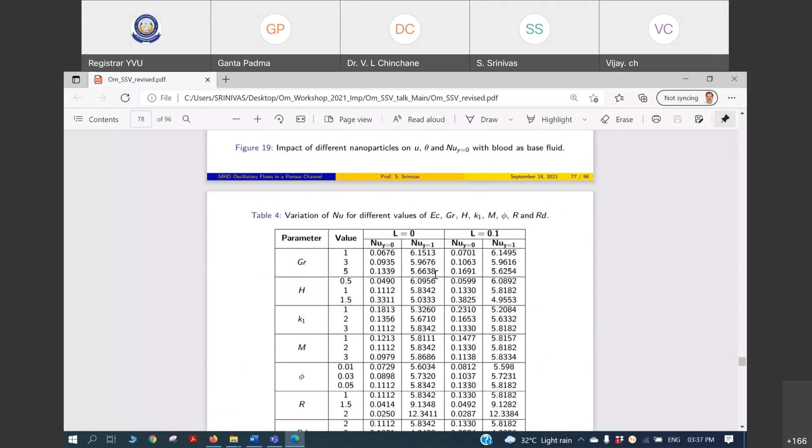The analysis is almost similar to any other fluid dynamics problem. We explore the effect of all the inherent parameters that arise in the problem on physical variables like temperature, velocity, Nusselt number, and so on. I think that covers it. Similarly, by varying different parameters, we tabulated how the heat transfer rate occurs at both the left and right walls, and we have analyzed the important results in that particular paper.

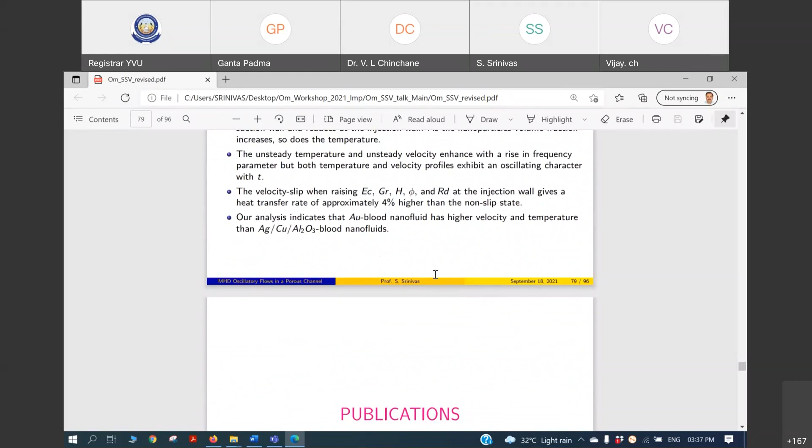Our analysis indicates that blood-based nanofluid with silver, copper, and alumina nanoparticles shows Au-blood nanofluid having higher velocity and temperature than the other nanoparticles considered. The velocity and temperature of the fluid increase with increasing Eckert number, Grashof number, and radiation parameter, while the reverse trend is observed for K1 and Reynolds number.

Increase in the applied magnetic field enhances the fluid temperature at the suction wall and reduces it at the injection wall. There are two walls: the injection wall on one side and the suction wall on the other. These are some of the conclusions we have derived. As the nanoparticle volume fraction increases, so does the temperature.

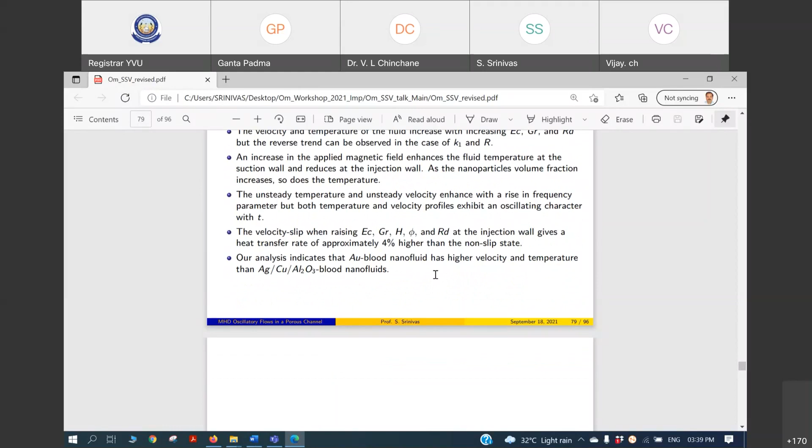The unsteady temperature and unsteady velocity enhance with a rise in the frequency parameter, because we are taking a heart pumping mechanism. This frequency parameter's influence is explored, so the unsteady temperature and velocity both enhance with a rise in frequency parameter.

But both the temperature and velocity profiles exhibit an oscillating character. These are some observations, which we can discuss in detail including the physics part. Some interesting conclusions we have presented in the paper that we have published. So we are working in this direction.

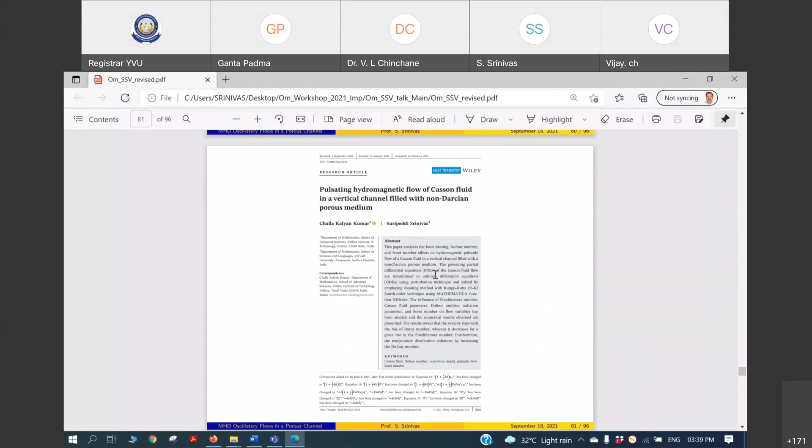Some of the papers we have published in this direction are: this one, pulsating hydromagnetic flow of a Casson fluid in a vertical channel filled with non-Darcian porous medium. Then these two papers I am talking about, this one and this one. A note on the pulsatile flow of hydromagnetic Jeffrey nanofluid through a vertical porous channel, which appeared recently in European Physical Journal. These two papers I am going to share with the convener so that they can pass them on to other investigators.